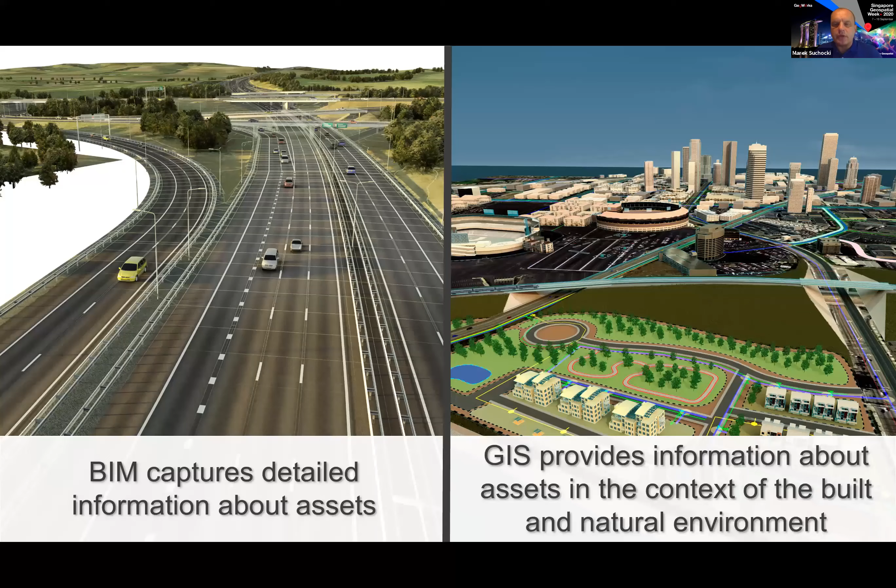And we want to be able to share that information between the two groups so that a GIS user can consume model data within their technology platforms. And similarly, a modeler, a BIM designer, can consume GIS reference data sets to create better context of their proposals and plans. And when we speak to different parties out there, they have different needs. So you can't say that a designer has the same understanding as an owner. So whether it's I want to design it in context, as I've mentioned, or I'd like to use a building model from handover to do spatial analyses and queries.

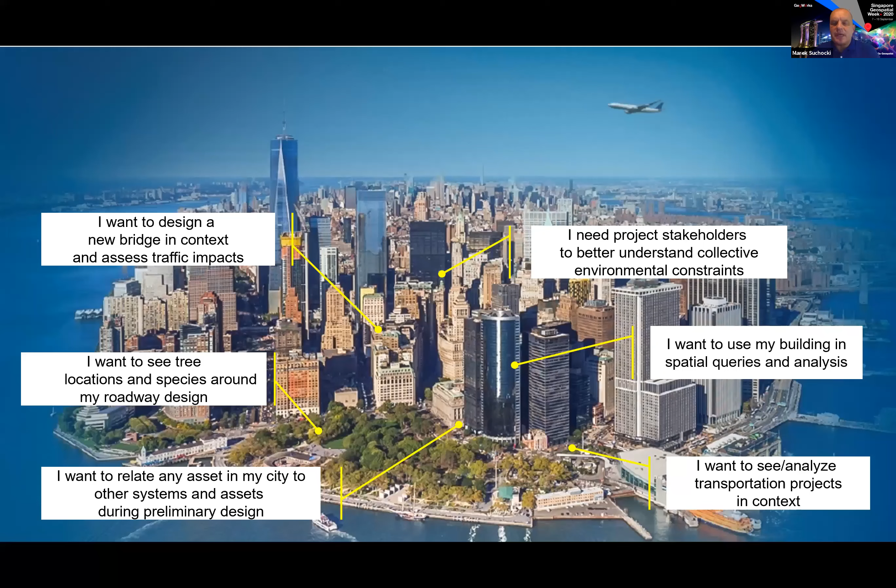Currently we're in the COVID-19 challenged world. It'd be great to use models to look at simulating different layouts of offices, of train stations, in order to maintain and preserve social distancing. So having that BIM data available in a spatial context and vice versa is really important, and it depends on your own perspective on the value you might determine from it.

There are, however, some problems with this, and I'm looking back here at a report that came out over 15 years ago in America by the National Institute of Standards and Technology that talked about the cost of interoperability being 16 billion annually, of which nearly 11 was borne by the owner. So the fact that information was poorly exchanged between different systems and different technologies meant that there is an inherent cost in the translation and the associated errors from poor interoperability.

Similarly, Barbara White Bryson prepared a very interesting book in 2010, where she said that ours, the construction industry, is the only trillion-dollar industry in the history of the world in which clients routinely demand the most inefficient processes creating the least value. What she meant by that is that by reinforcing the adversarial behaviors within construction projects, the poor handover of data, so sending the people after you 2D PDFs or perhaps a shapefile in a GIS context, would mean that you're not giving the best information transfer possible.

So what can we do about this? Well, at the moment, we need to fix these current workflows. At the moment, information is not federated. So we're not bringing information together. Geographic data in particular can be stored in many different resources. And typically there is a challenge in sharing that information.

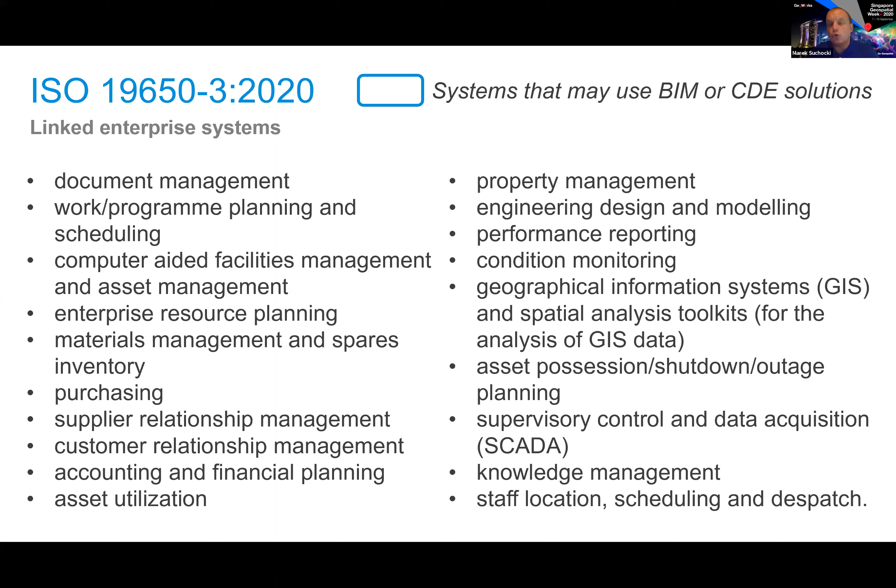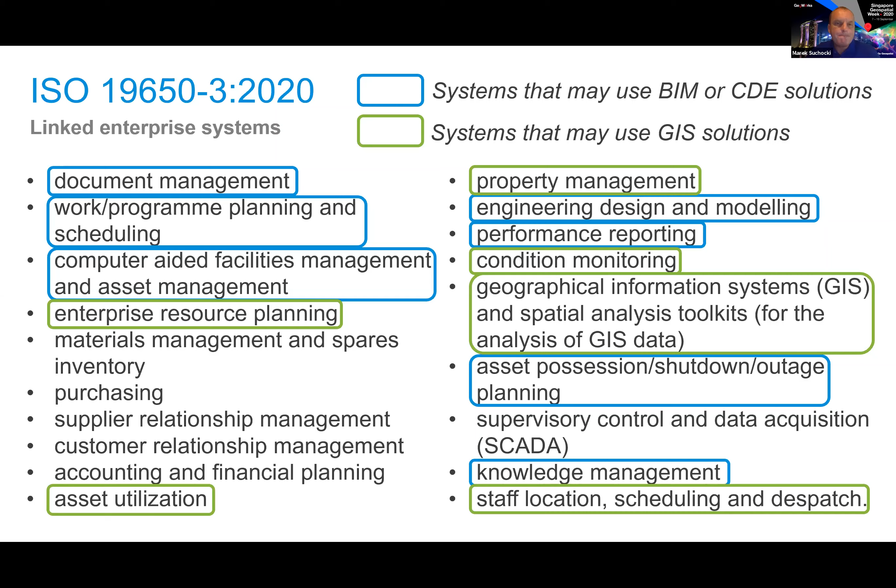And I just took a stab at saying that some of these systems may already use or could use BIM or a common data environment to host information. So I've selected them there. And very similarly, systems could use GIS as a reference. And when you look at that coverage, it shows you that actually a vast proportion of those linked enterprise systems could leverage either BIM and or GIS. So let's consider how we might connect BIM and GIS to address this demand.

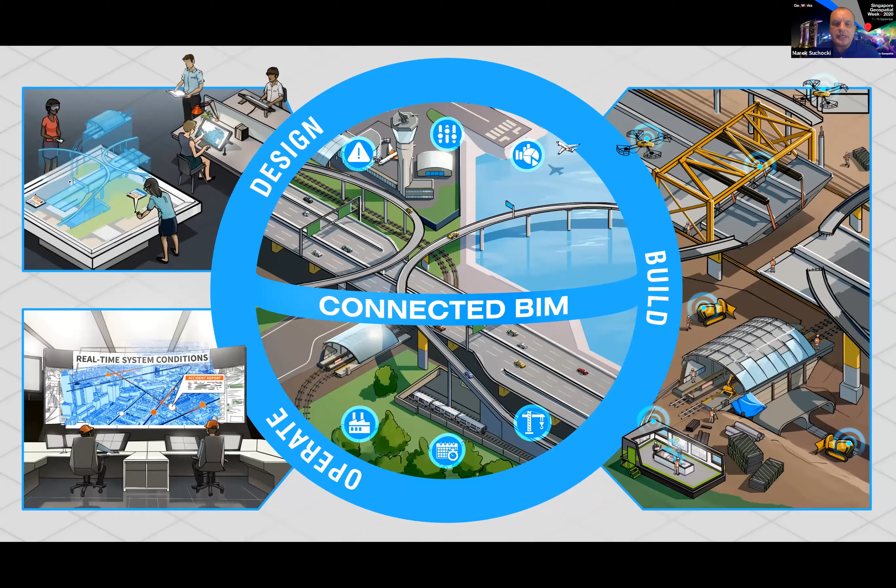So from our perspective within Autodesk, we always see the entire asset lifecycle as something that could be augmented by data and connectivity. And whether you're in the planning, the design, the build, or the operational phase, there is value in having good data. And we see a separation between where BIM is strong and GIS is strong. It doesn't mean that you can't use either system in the other phases, but actually GIS is stronger in the operational phase. Many, many asset owners have GIS systems to manage their asset estate, or as I said, data around traffic or other planning needs.

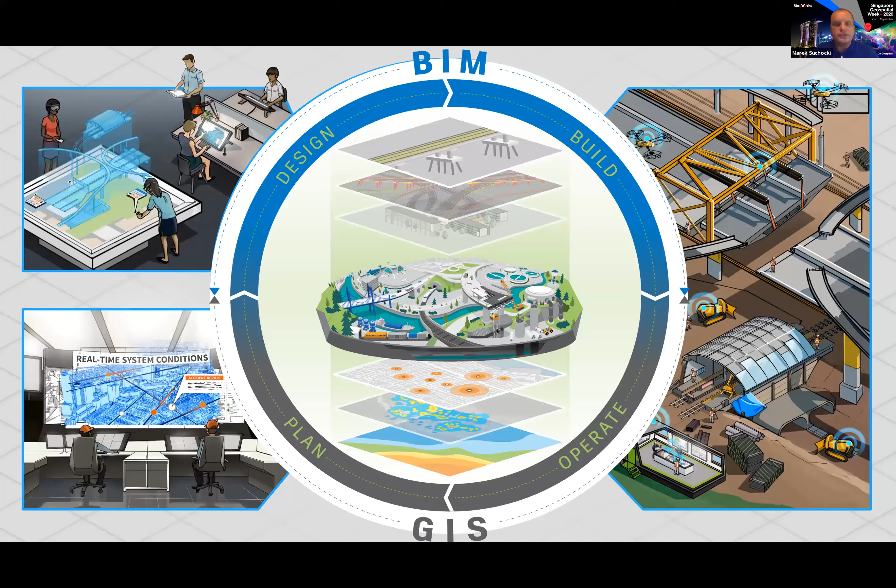And in the design and build phase, BIM is becoming ever more predominant and valuable to designers and constructors, as well as to engage stakeholders to better understand what's going on. So Autodesk and Esri a few years ago came together and said, well, we sit on both sides of this divide. Why don't we come closer together to help our user communities get better value out of data, because we want to go on a data-at-the-center journey in order to not have these silos of information and silos of practice. So we've looked at a number of our technologies together and are adding functionality to mutually read each other's data sets.

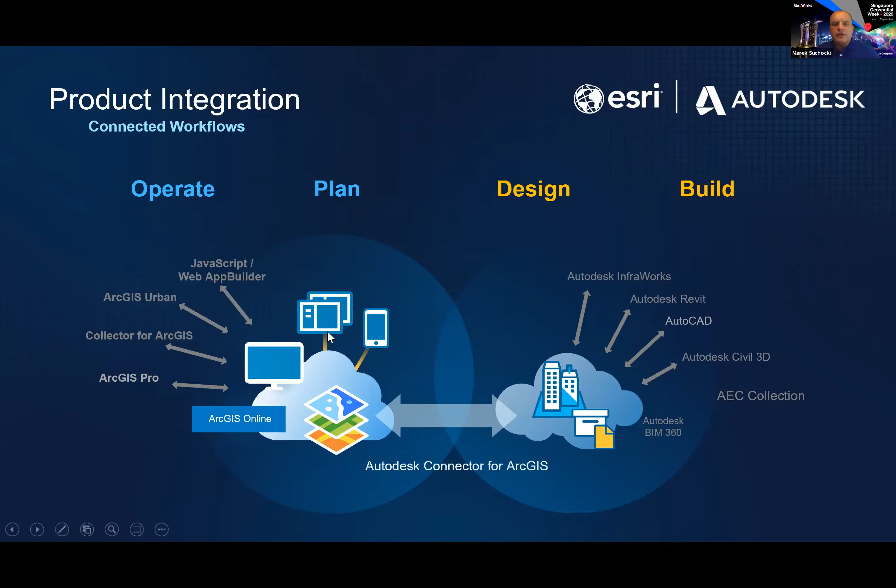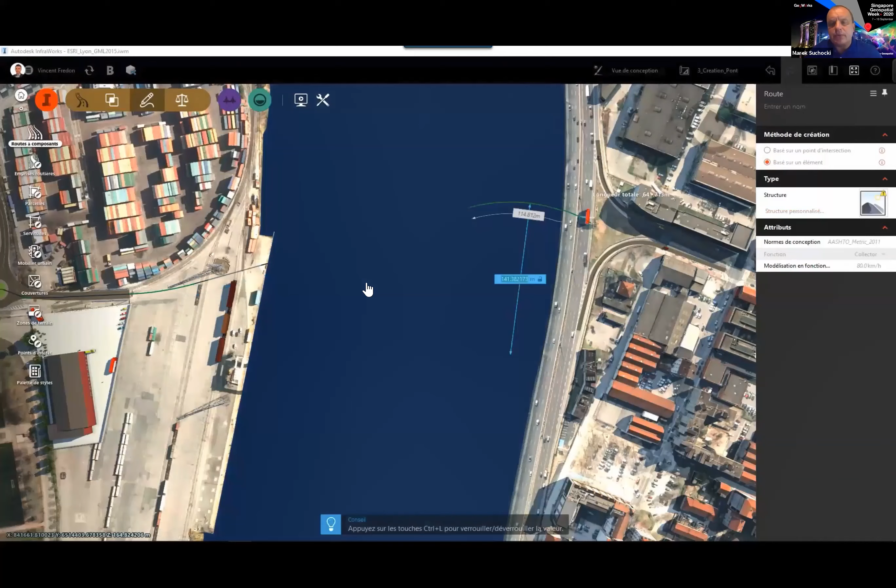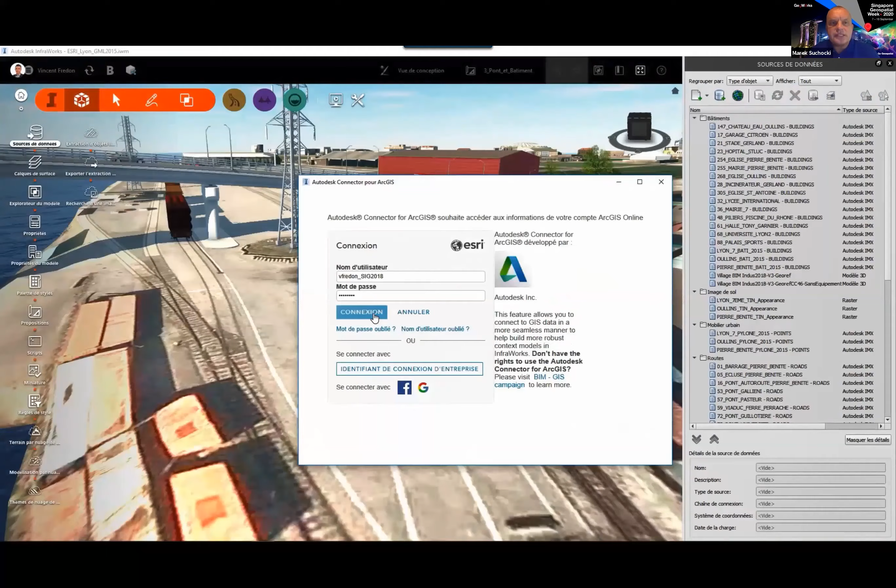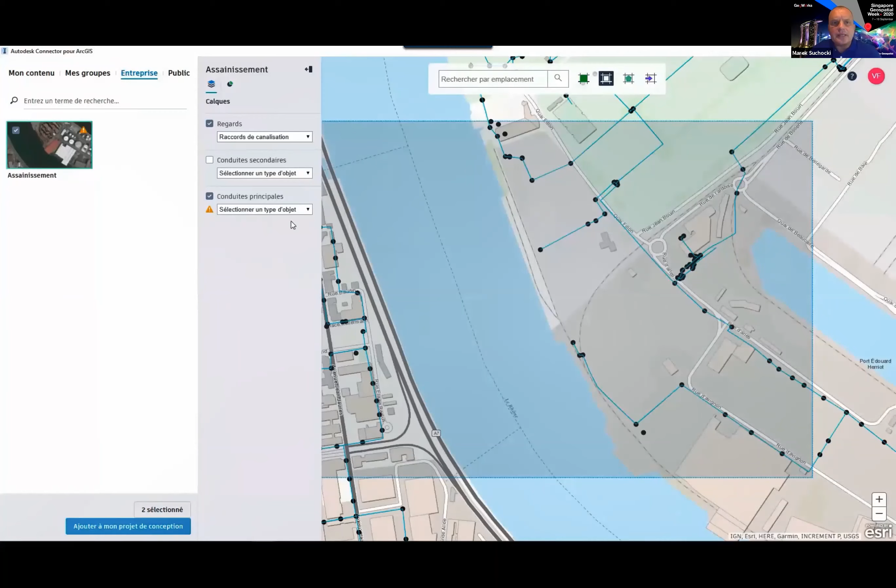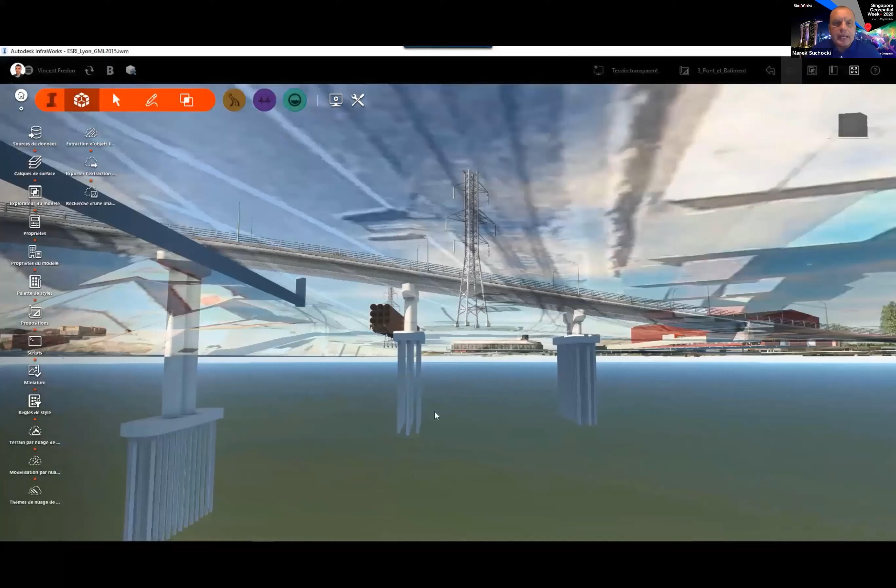So now the designer has pulled in, as we say, some pipe work and manhole positions. And actually what could also happen is that somebody could go out in the field and add some data. So this is using mobile technology and creating more asset data so that we have a full record set. So this is a spatial data process that's being executed in the field. We've now added the data there and assigned particular categories of information.

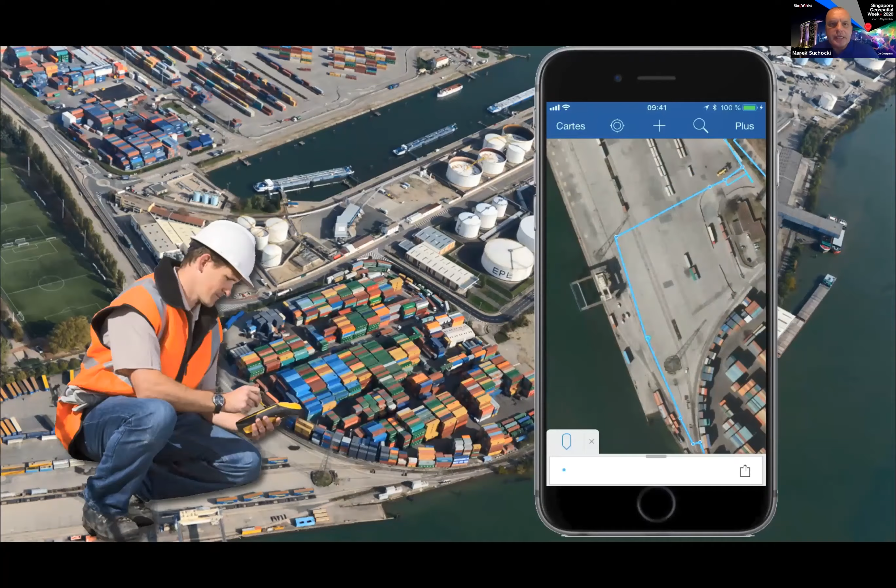The thing here is that what we're getting here is the model. So this designer who felt that his bridge design is perfectly acceptable, he's doing an update, he's refreshing the screen, and what we'll see is that additional data has shown us that there is currently a very significant clash with the pipe going through one of the foundations of the bridge piers.

So the designer now can quickly make an adjustment and ensure that that clash doesn't get manifested when the bridge gets constructed. So what we have done is we've done some very early consideration of potential clashes and fixed it in the context of the model, because we've got access to that rich, bang up to date GIS data.

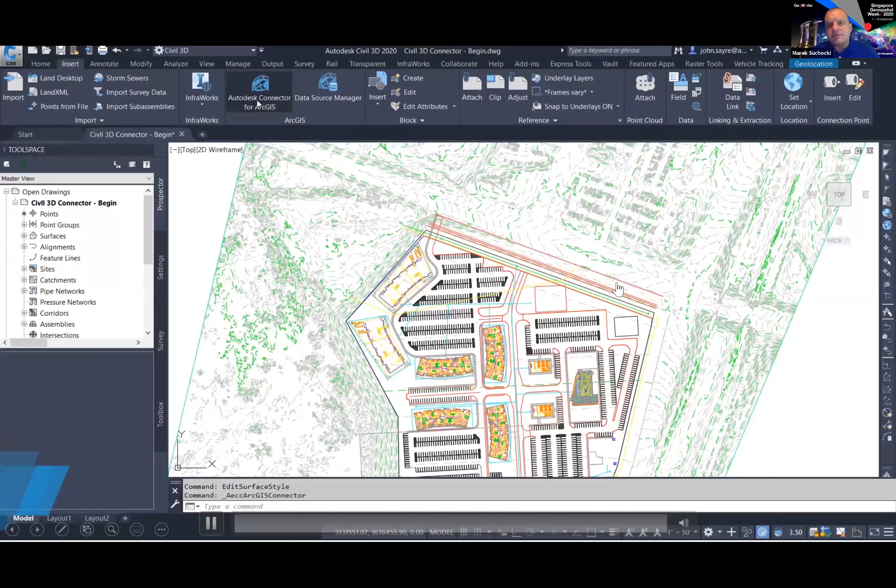So the second example I'm going to show you here is where within our Civil 3D, civil engineering application technology, we're similarly able to pull in information from Esri ArcGIS data. So again, we're pulling in some pipework data, some feature lines, and essentially the modeler, the engineer here, he or she has the ability to access data and add it to their contextual design project.

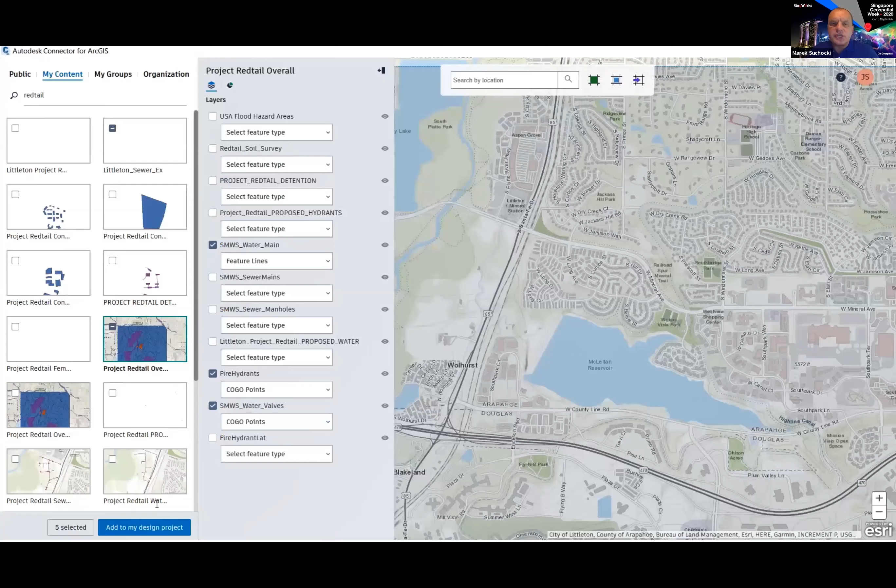And similarly, they can set pipework diameters in this case, so that if that data doesn't exist within the Esri source data, we can actually correctly create it when we're building a three-dimensional BIM model. And as you can see here, the attribution has come through from ArcGIS. So all the information, that rich data about these assets that was available in the ArcGIS system is available to the modeler.

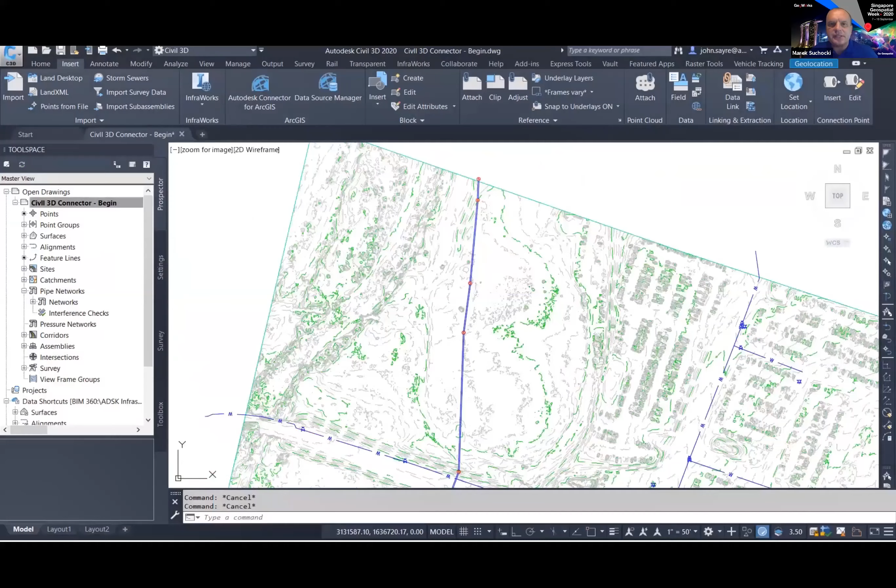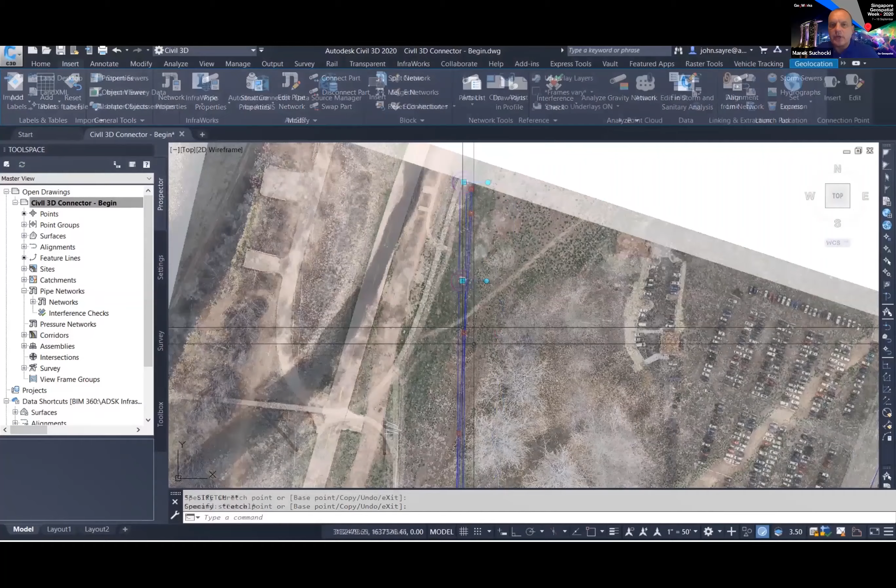What's happening here is that the modeler has recognized that there was an error in the ArcGIS data, that some of that pipework and its manhole positions were in the wrong place. So he's corrected it, and now we do an update within the ArcGIS environment. So we've got a bi-directional sharing of information to ensure that we have accurate information, because it may have been poorly stored in the original design.

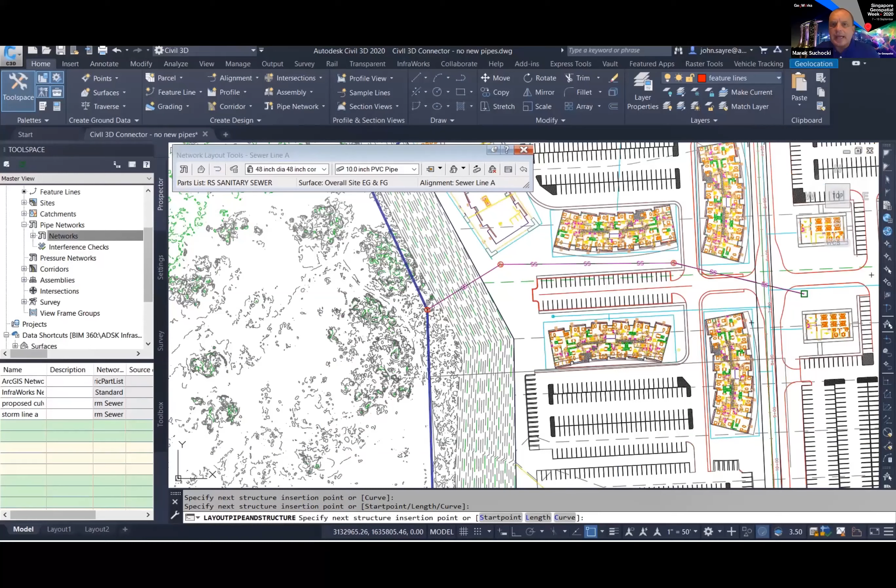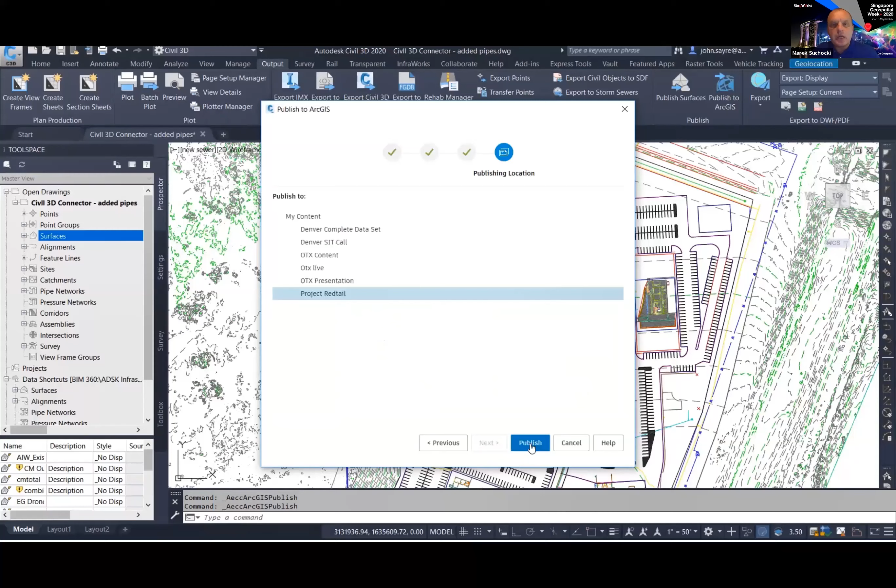In this case, the designer is now tracing a new pipe network for a new proposal, a new estate. And again, they're actually updating the information available in ArcGIS to include the features and in this case, a pipework, so that everything that is being proposed can now be added as a proposal within ArcGIS. So the owner, the appointing party using the language of the ISO 19650, they are now aware of the new suggested, in this case, estate.

So we've got a bi-directional connection now, whether we're using the contextual modeling of the InfraWorks toolkit, or in this case, the Civil 3D accurate engineering, we can share information either taking data out of the ArcGIS environment or bringing it in.

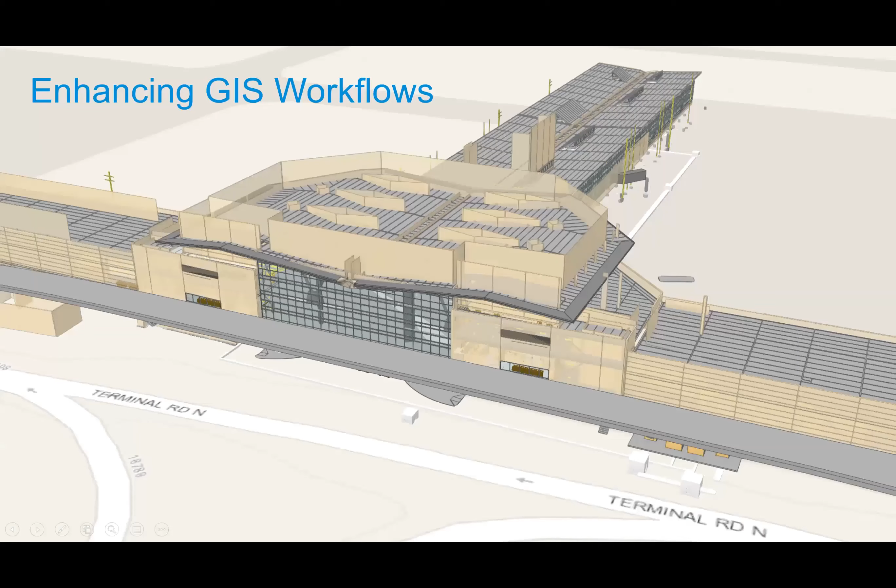So let's now look at how the BIM data can be added to the GIS user. So what we have here is a Revit model, one of our BIM technologies, and the ArcGIS user here has been able to actually upload that data by pulling it in, and is now viewing this within an ArcGIS Pro scene. So we've now got BIM data readily available to a geospatial user. They may need to use this to understand the context of a proposal, or in this case, a delivered asset.

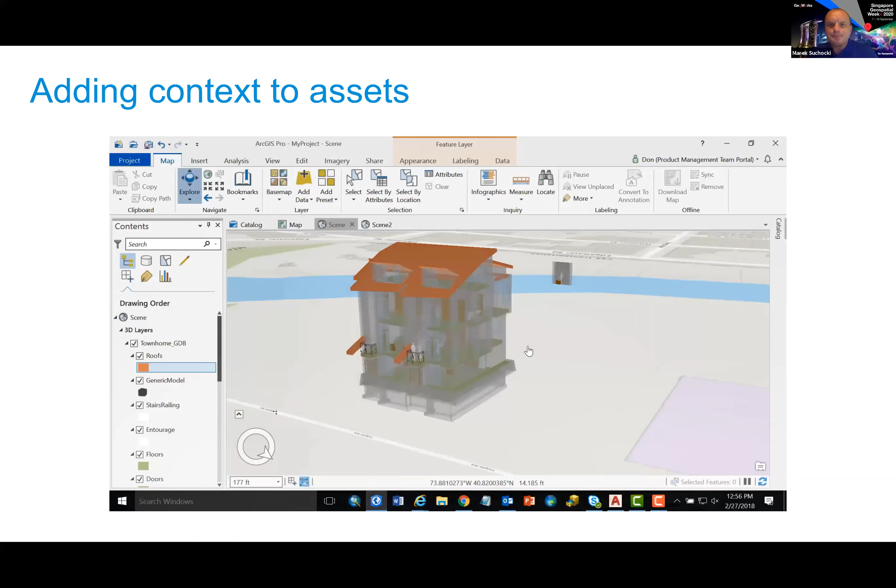But one thing that this particular illustration is going to show is how we can start adding attribution, because some of these attributes may not have existed in the original BIM model, but they can now be augmented and enhanced with the use of the Esri toolkit.

So we're now adding data, adding value for the asset owner of the kind of information that they want. And we're now doing a re-export back out into a CAD model. So the data that we've added will now be available to a user of a CAD tool. So effectively, we've got now a bidirectional share from a GIS back into the CAD world.

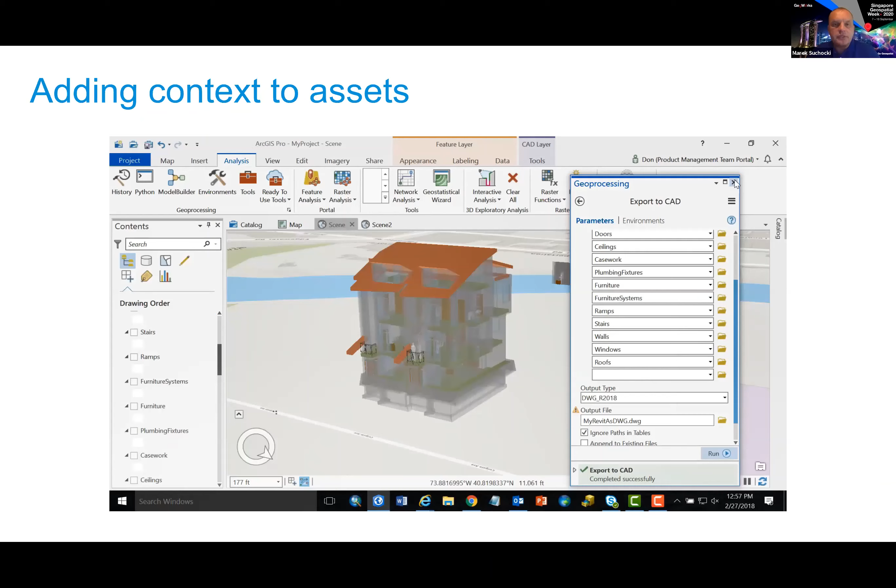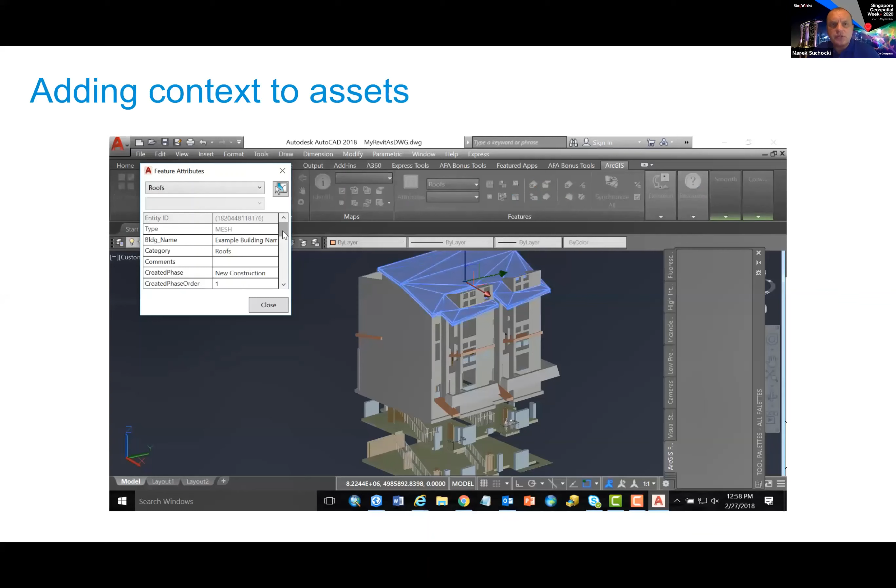And very shortly now, we're going to upload, in this case, AutoCAD view, and we're going to open up that file that has been edited by the GIS user. And again, as we can see, the new attributes that have been created by that GIS user.

So my next example is more of the same in some respects, but now what we have is a scene in ArcGIS, and the user is now logging into the Autodesk Common Data Environment technology, BIM 360, and allowing them access to live current project data.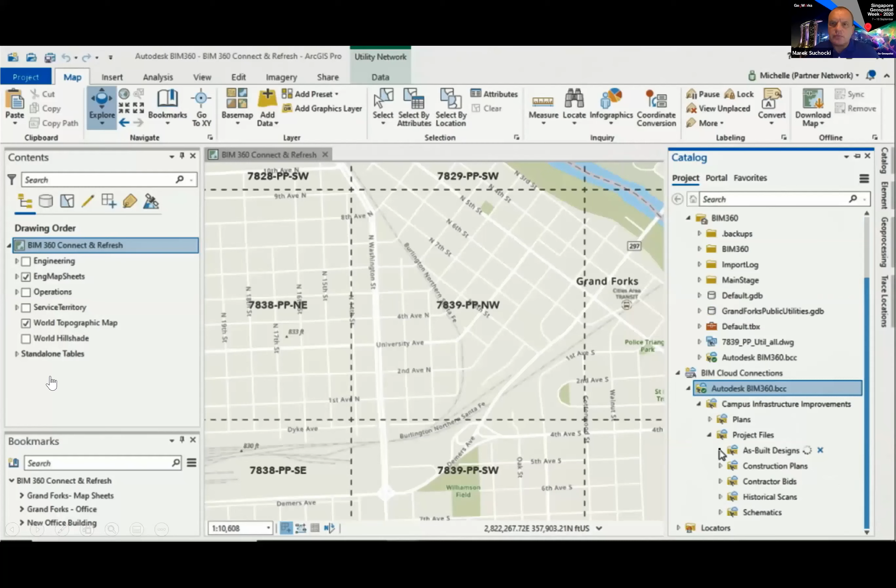So they can now start seeing what information has been created as the project, and they can navigate the folder structure within that common data environment to pull it in and start using it as references within their GIS environment. So I'll let the scene upload now.

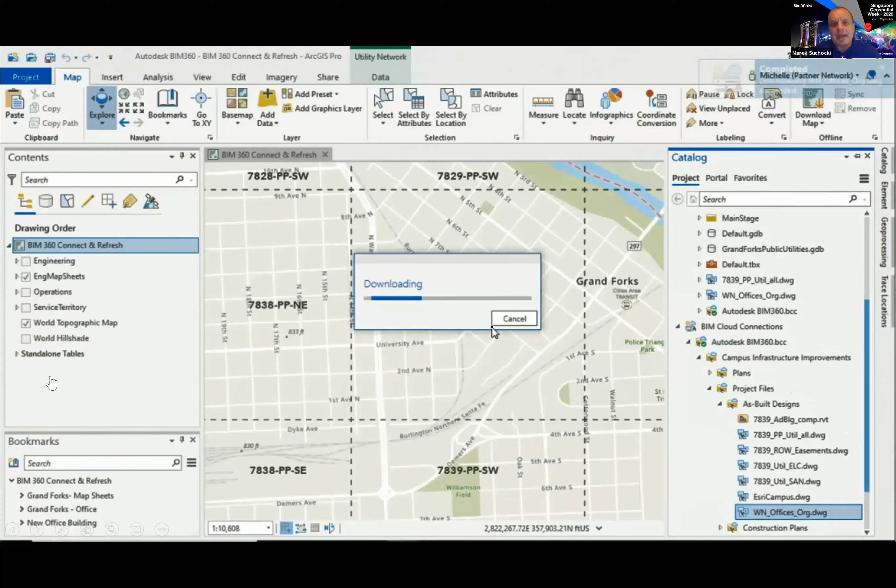So what we now have is a brand new proposal, similar to the one we showed earlier. In this case, it's a building proposal, and the GIS user now has full access to this data so that they can now navigate it in their ArcGIS. The ability to read and view and update that information from their GIS world.

And also they can load that data at some point, but they may be concerned that that data is no longer current. So we can actually do a check, is this data current, yes or no, and they'll get an alert, or they'll be able to tell, no, you need to update that record because it's changed since you last referenced it. So what we have here is the ability to keep current data within either environment.

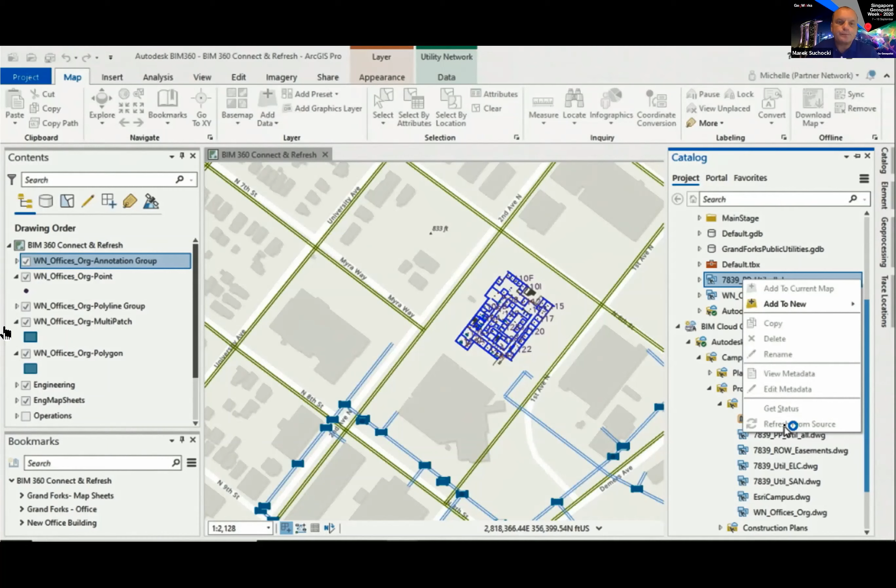I want to step forward. Oops.

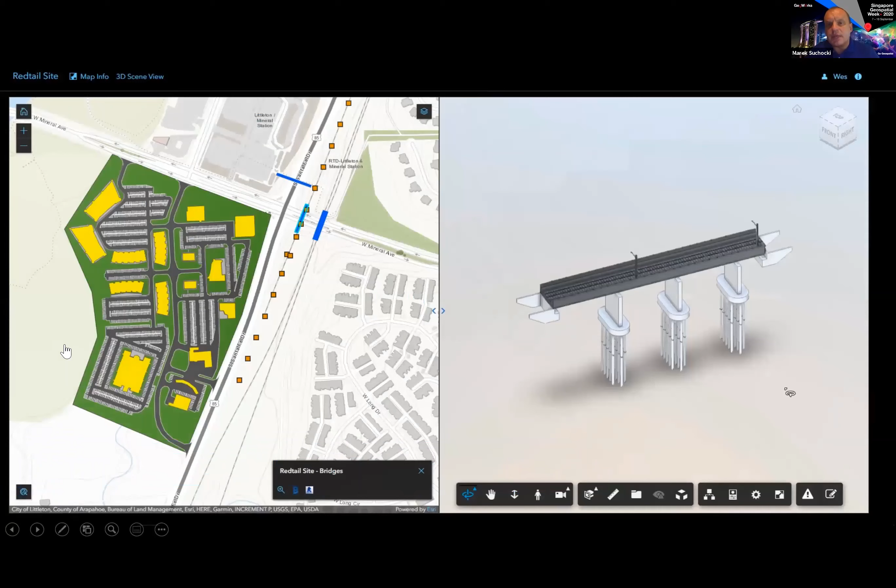And then, so the last example here, now this is a newly developed pilot toolkit that Esri are working on, which they'll launch, I believe, in the next 6 to 12 months. But again, no guarantees on when they might be able to get it.

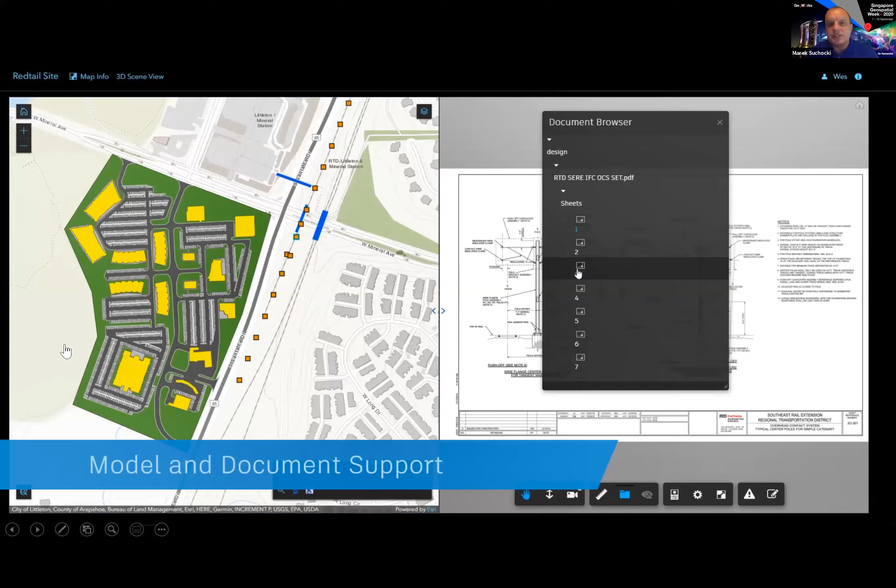But now we're talking here about doing direct association of records in the GIS world with records in the Autodesk BIM 360 Common Data Environment world. So effectively, we're linking information, whether it's CAD drawings or in this case a full model. The GIS user can literally click on an item within their GIS environment and open up and view the data for that asset within the Autodesk BIM 360 toolkit.

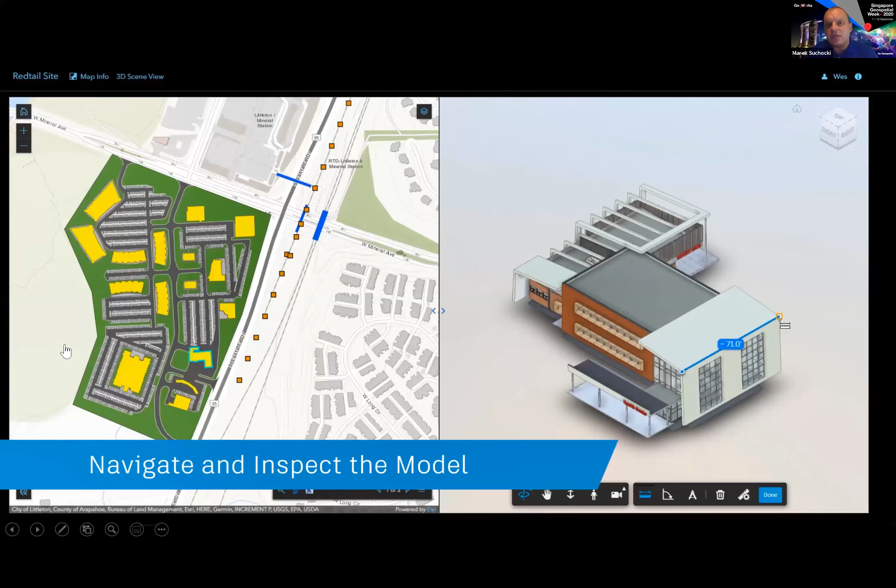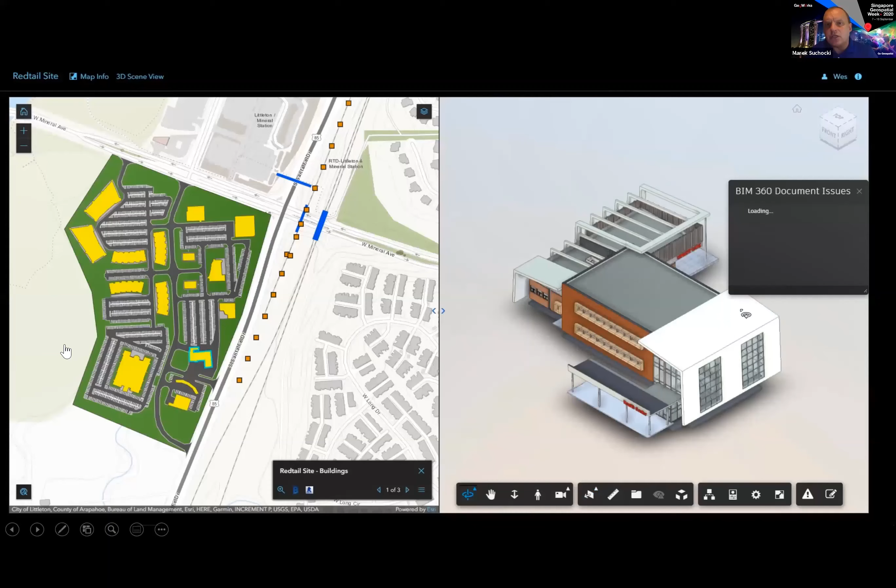And by doing so, they then get to leverage all of the powerful model viewing, commenting, and analysis tools that any user of the BIM 360 environment has. So we've got the beauty of both sides of the project team, whether they're geospatial or model users, able to access the same good data and use the most appropriate tools to navigate and manipulate them.

And when the project is completed, they can publish those as-built features back into the geospatial environment. And so the geospatial user, they're aware now that there's good new data available. They can obviously cleanse it if need be, but that data is now not just the geospatial data, but it's also augmented with model and BIM data.

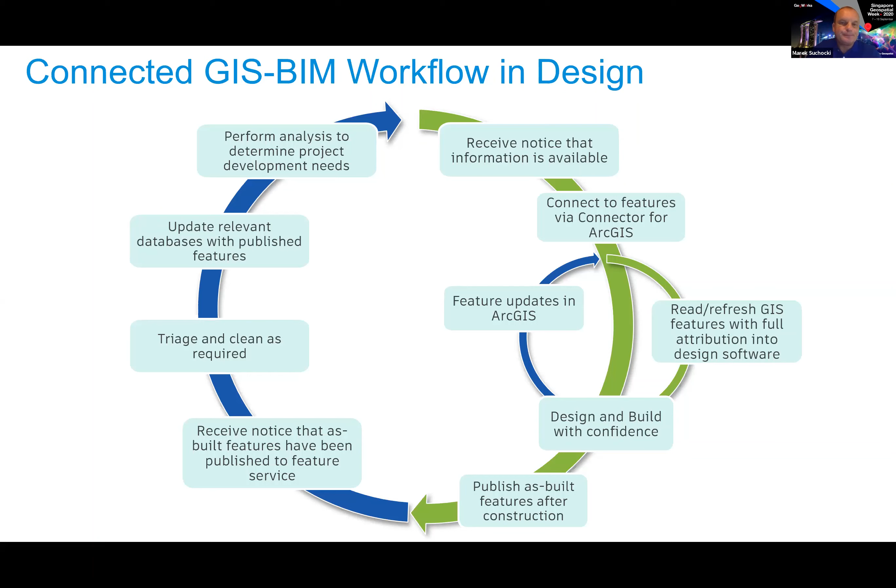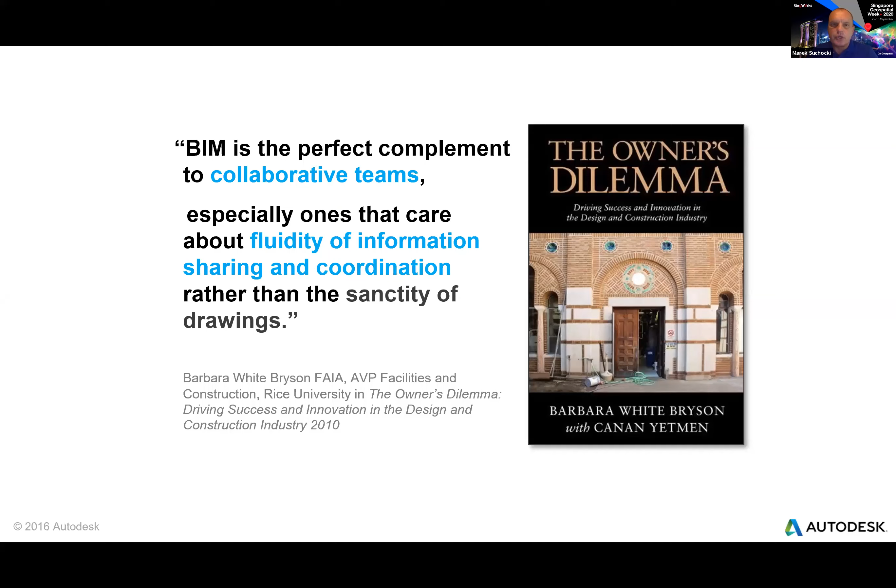And finally, I'll finish with a comment from Jack Dangermond, the president and co-founder of Esri. He said at the time when Autodesk and Esri announced their alliance that it's not really about having open data, because any information that is shared is by its very nature open. It's about connecting those tools to other tools at the data level, so that, he said, bang, it just changes things. And with that, I'm pleased to say I finish and can be open to any questions.